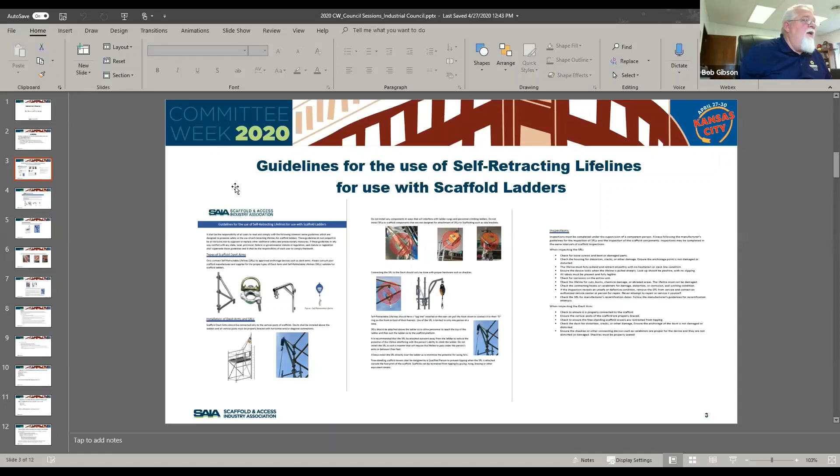So walking through this, we went through this in the last meeting, and there were a lot of comments and suggestions. We went back and went through those things and made adjustments. I want to walk back through this one more time and make sure we've got those items addressed. Once we've completed this, we can move forward with sending it for some oversight, and hopefully we'll get this prepared to get out for some folks in the field to use.

So with that, one thing is we changed the title of the document. Now it states guidelines for the use of self-retracting lifelines for use with scaffold ladders.

It shall be the responsibility of all users to read and comply with the following common sense guidelines, which are designed to promote safety in the use of self-retracting lifelines for scaffold ladders. These guidelines do not purport to be all-inclusive, nor to supplant or replace other additional safety and precautionary measures. If these guidelines in any way conflict with state, local, provincial, federal, or government statute or regulation, said statute or regulation shall supersede these guidelines, and it shall be the responsibility of each user to comply therewith.

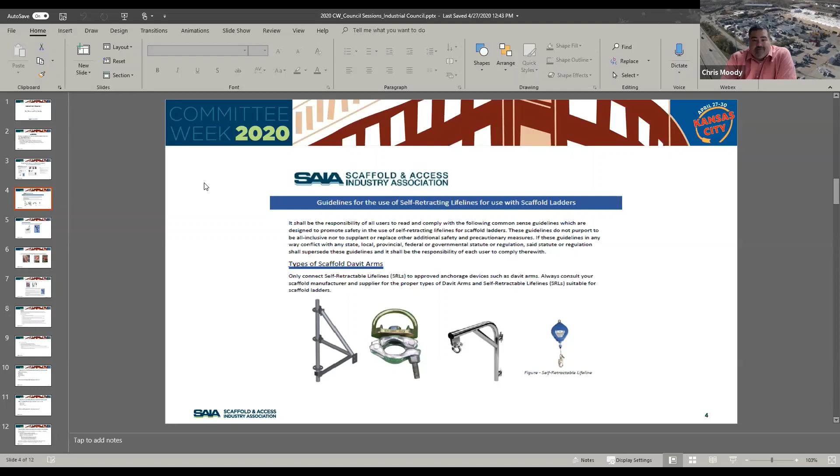Hey Bob, hit F5 on your computer and you can make that screen a little bigger. Well, does that work? No. I think the problem I've got is multiple monitors, so it changed on the other monitor. Oh. All right, well, then we'll just go with it. Never mind, I was just trying to make it a little bigger for everybody to see. If it changed on the other monitor, then that should be the monitor you share, and then you'd get it full screen. Let me see if I can stop the share and change it. One second. Did that change? There we go. Yes, sir. Okay. All right.

So next page, installation of davit arms and SRLs. Scaffold davit arms should be connected only to vertical posts of scaffolds. Davits shall be installed above the ladders, and all vertical posts must be properly braced with horizontal and/or diagonal connections.

Do not install any components in ways that will interfere with ladder rungs and personnel climbing ladders. Do not install SRLs to scaffold components that are not designed for attachment of SRLs to scaffolding, such as side brackets.

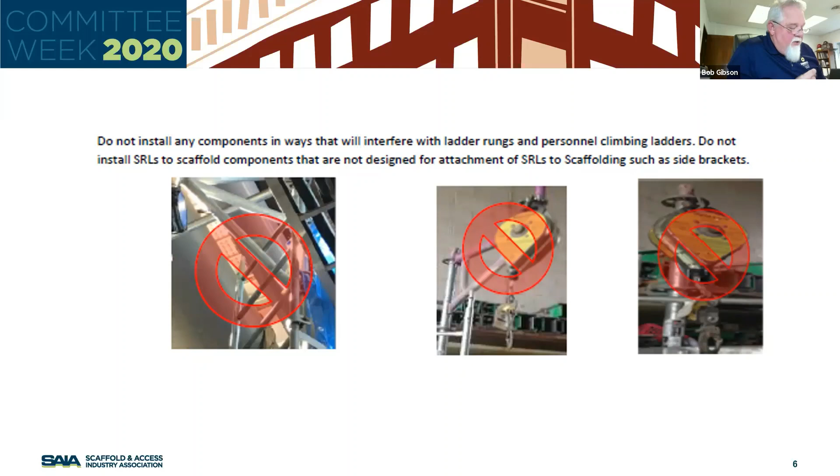The two pictures on the right, I'm actually looking to change those to something a little better. If anyone has any pictures, we would welcome those. I want to change those two pictures to something that shows a little bit clearer, and maybe clean that background out.

Can you go back to slide 5? Your diagram on the left looks like it's showing the davit or the retractable way up above the framework of the scaffold, but the picture on the right is showing what you said, that everything had to have the horizontals and diagonals in at the point of attachment. I just wondered if that picture is in conflict with the diagram.

It's actually showing two different methods. This picture may be showing where it has the horizontals going all the way around, and the one on the left is showing a horizontal with two diagonal braces back down. So it's actually two different things. Got you, okay. Thanks, okay.

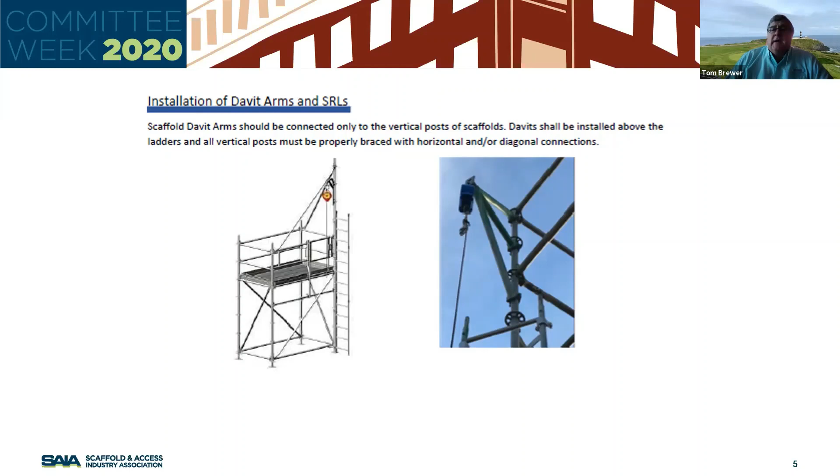Connecting the SRL to the davit should only be done with proper hardware such as shackles. I know there was a comment about adding something about carabiners. I did not do that. Do we think that should be part of it? I know a lot of the fall protection manufacturers do supply carabiners for that. So if anyone has any objections, or I think we should add carabiners in there, send a note or speak up.

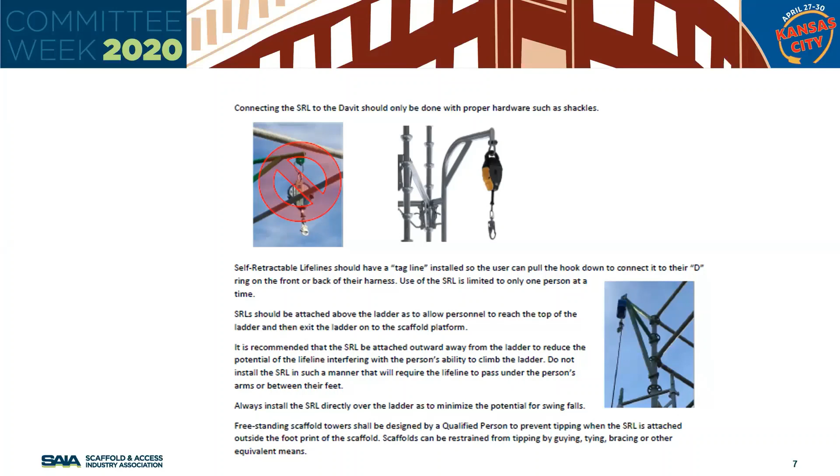I think you'd have to add in there that it has to be a properly rated carabiner. Because if you just use the blanket term carabiner, I've got carabiners that won't hold my tools, much less an SRL. Okay, properly rated carabiner.

Self-retracting lifelines should have a tagline installed so the user can pull the hook down to connect it to their D-ring on the front or back of their harness. Use of the SRL is limited to only one person at a time. The SRL should be attached above the ladder as to allow the person to reach the top of the ladder and then exit the ladder onto the scaffold platform.

It is recommended that the SRL be attached outward away from the ladder to reduce the potential of the lifeline interfering with the person's ability to climb the ladder. Do not install the SRL in such a manner that will require the lifeline to pass under the person's arms or between their feet. Always install the SRL directly over the ladder to minimize the potential for swing falls.

Freestanding scaffolds shall be designed by a qualified person to prevent tipping when the SRL is attached outside the footprint of the scaffold. Scaffolds can be restrained from tipping by guying, tying, bracing, or other equivalent means.

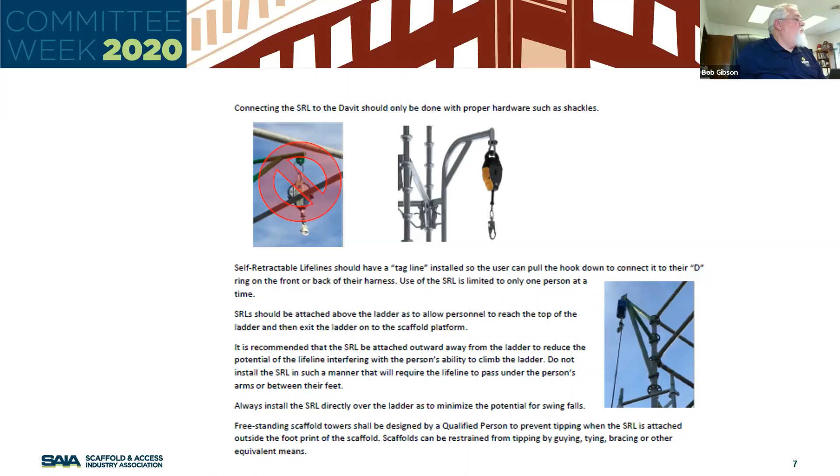Inspections must be completed under the supervision of a competent person. Always follow the manufacturer's guidelines for the inspection of SRLs and the inspection of scaffold components. Inspections may be completed at the same intervals as scaffold inspection.

When inspecting the SRL, check for loose screws and bent or damaged parts. Check the housing for distortion, cracks, or other damage. Ensure the anchorage point is not damaged or distorted. The lifeline must fully extend and retract smoothly with no hesitation or slack line condition. Ensure the device locks when the lifeline is pulled sharply. Lockup should be positive with no slipping. All labels must be present and fully legible.

Check for corrosion on the entire unit. Check the lifeline for cuts, burns, chemical damage, or abraded areas. The lifeline must not be damaged. Check the connecting hooks or carabiners for damage, distortion, or corrosion and working condition.

If the inspection reveals an unsafe or defective condition, remove the SRL from service and contact an authorized service center or person for repair. Never attempt to repair or service it yourself. Check the SRL for manufacturer's recertification dates and follow the manufacturer's guidelines for recertification intervals.

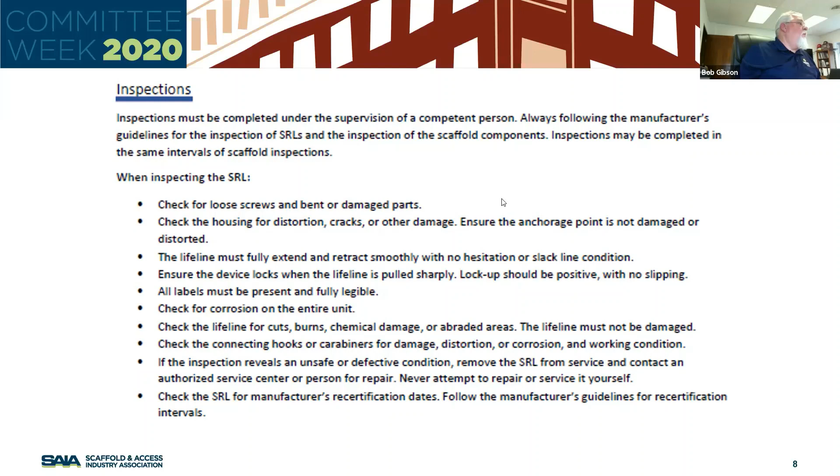This was the last slide on this. When inspecting the davit arm, check to ensure it's properly connected to the scaffold. Ensure the vertical posts of the scaffold are properly braced. Check to ensure the freestanding scaffold towers are restrained from tipping.

Check the davit for distortion, cracks, or other damage. Ensure the anchorage of the davit is not damaged or distorted. Ensure the shackles or other connecting devices such as carabiners are proper for the device and are not distorted or damaged. Shackles must be properly seated.

So that's all of that. If there were any comments, Chris, is there anything coming through in the comments? No, sir. Okay, so I think we've about covered that. There will be a minor change at the beginning regarding what we stated about the carabiners, and we'll change those pictures. Then we should be able to take this to the next steps, which would be the oversight, and once we've completed those, we'd be ready to put this out for everyone. Any other questions or comments before we move forward?

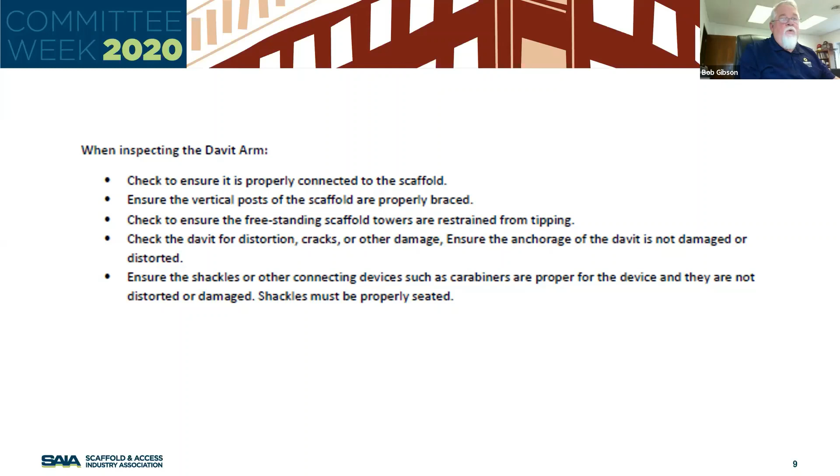What about ladder cages? Because they're pretty common in the refinery world anyway. So that would kind of be included in there. Do we want to make something that's a guideline? Do we need a guideline specific to ladder cages, or is it something that's scaffold access for industrial environments?